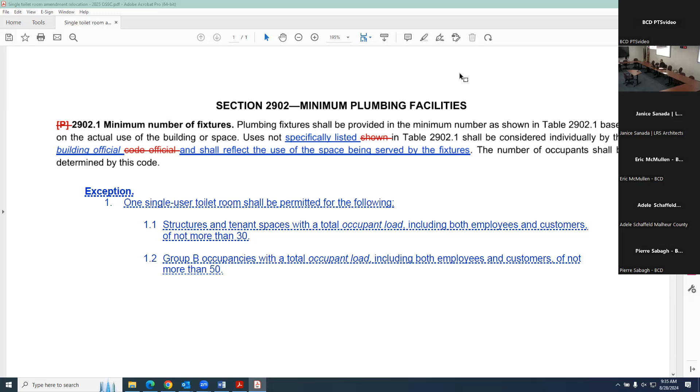So structures and tenant spaces with a total occupant load, including both employees and customers, of not more than 30, group B occupancies. Before it said business occupancies, and I know that there were questions that we received about that. So I changed that to group B occupancies with a total occupant load, including both employees and customers, of not more than 50. Any feedback on that? I like it. Thanks for that, Adele. Jody, any input on that? That should be fine. Yeah. Okay. Great. So we'll roll that into chapter 29.

What else do we have tabled, Laura? I'm seeing we have item 16-9, 17-8, 17-9, and 17-13 on the matrix. And we have SEAO here. I don't know if it's time to cover those yet or not. Yes, yep. And I see Seth. Thanks for joining us, Seth. And I see Ryan as well there. So with that, Jeremy, I'm going to turn it over to you to cover the tabled items. You can reintroduce them and let us know if you need anything. Great. Sounds good. Thank you.

Committee, turn your attention to 16-9 in the matrix. This was the minimum uniformly distributed live load table, Table 1607.1. There was a public proposal, SEAO2. So Laura, could you please pull up SEAO2? And I'm going to turn it over to SEAO representation, Seth or others on the call, to go ahead and talk through. Yeah, this one.

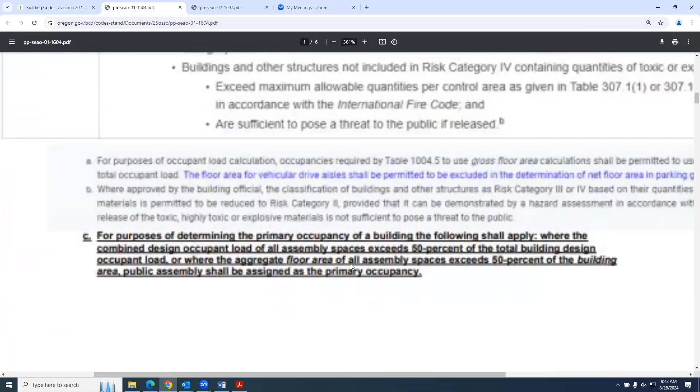Sorry, SEAO1. Public proposal SEAO1 clarifies how the primary occupancy of a structure is to be determined. I thought this one got approved by the committee yesterday. Yeah, I think it was approved. Yeah, this one was approved by the committee yesterday in my notes. Do you guys have the same record? Yeah, I've got flag to tell utilities as my note on that one.

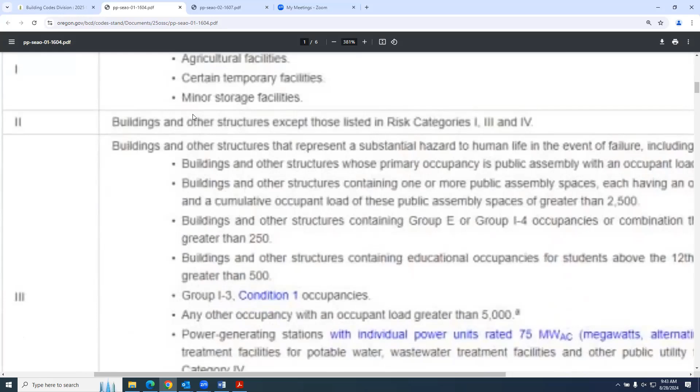Well, the one change we made to it was the public that was left in item 3 in Risk Category III, I think, where we added a strikeout. Oh, the second bullet point. Okay, I see. This has nothing to do with the public proposal. This was just a committee action, strikeout of the word public throughout that one. Yeah. Nothing related to the public proposal from SEAO on this one. This was just the committee's recommendations for cleanup on Table 1604.5, the use of public assembly.

Do we need to cover that right now, or can we just stick with the SEAO proposal items that were tabled yesterday? We can do the SEAO. Amit just joined. Okay. Are you able to unmute? Where'd he go? It's bottom left of my screen for me. I see you now, but you're still muted.

Let's go to item 17-8.

Oh, there you go, Amit. I see you. You just unmuted. Can we hear you, Amit? Yeah, can you hear me? Yes, yep, perfect. All right.

So we're talking about the proposal I think you wrote for live load in office space. Yeah. So I did my best to kind of queue it up, but I know you can speak better to it than I can. Yeah. So this proposal is just big. Can you hear now? Yeah. Okay. So this proposal is basically coming from a research work that was done.

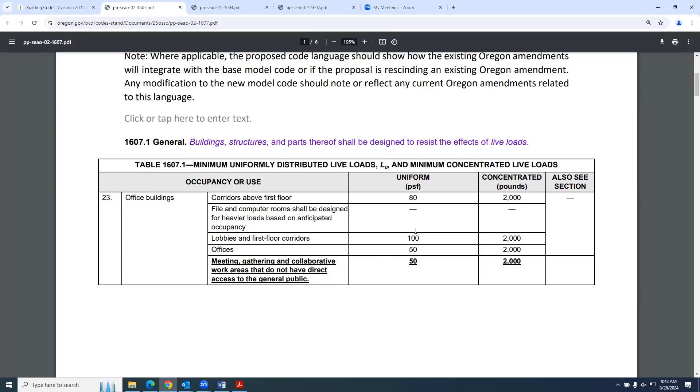Any other? So is it sort of your opinion or what was written in the study that basically assembly occupancy loading is a little too high? Is that kind of what? Yeah, basically to paraphrase the study, if you apply assembly or even the 80 PSF to an office space, it's really conservative for what's actually there.

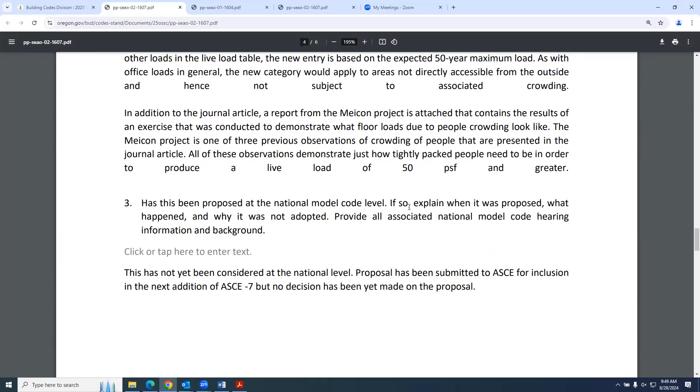Dave, I'm sure we could share the report that is being referenced here. I don't remember the exact words in the report, but it's 50 PSF is more than enough to cover office space. And it was authored by people who are very involved with ASCE 7 and have a very long history designing offices and working with those types of clients. So I can certainly vouch for the validity of the report, study, paper. But I don't know of any discussion of restricting the percentage or the overall square footage of that area.

So is this a report or is it an actual code change that's going through ASCE right now? It's both. It's a paper, and the paper is kind of the reason for the ASCE 7 change proposal. Okay. How far has it gotten through the code change proposal with ASCE? Because I know our stuff takes quite a while just to get through the code change process. Yes, let me look. Thank you.

I think it is about to be balloted by main committee this fall. Or let's see here. Let me check. Oh, never mind. It has already been balloted by main committee. Yes, it was live load ballot number 1.

You guys hear me now? Yes, we can hear you, Amit. Okay, I'm having real issues with my connection.

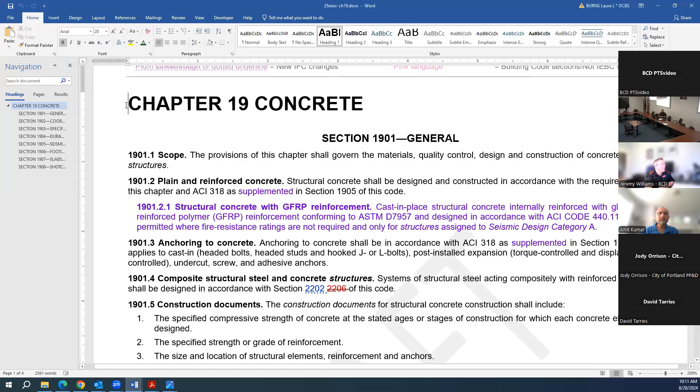And then you scroll down, it doesn't say to go to ACI for the quality control, and then we have the special inspection requirements down below in 1901.6. And then just like Rabi mentioned, in ACI 318, which we don't have access to share, but Chris Wong has that pulled up. So ACI 318-19 states, unless otherwise specified in the general building code, items shall be continuously or periodically inspected in accordance with sections 26.13.3.2 and 26.13.3.3 respectively. And 26.13.3.2 gives the continuous special inspection requirements that you're seeing in the SEAO proposal.

So that's generally how this is laid out from a code enforcement application, just so you can see what's going on here. And this is kind of a consistent issue, I think SEAO knows this as well, with AISC 360 for steel. It has quality control and assurance requirements that we don't directly point to. We carve out those things. We point to the special inspection tables.

Same with the others. And now we've got the stainless steel one where the model code is pointing to the quality control of that standard. Same with the proposal you'll see later that Dave Tarries will be talking about with the aluminum design manual. So there are these standards with quality control requirements, and our code has the special inspection requirements, so there's some overlap and cross coordination on how those are intended to be applied. Just wanted to share that. So this is up for committee discussion. Any other thoughts, input?

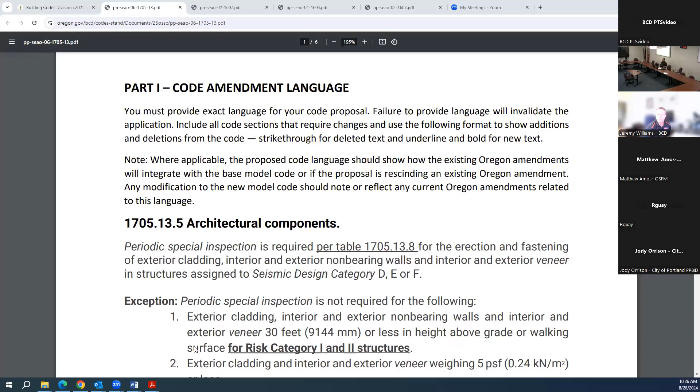So now I'll let SEAO speak up to this proposal, SEAO 6 in the matrix. Architectural components. You pull that one up, Laura, just so the SEAO folks on the call can see this one. Yeah. So if Amit, Chris, or Dave, or any others from SEAO representation could go over this one.

I could speak on this. There were a couple members on the codes committee at SEAO that felt there should be special inspections for some of the non-structural components, the architectural components, really the nonbearing partition walls, because they were seeing that a lot of those systems were being overlooked in the field during construction. And in particular, they're worried about the compatibility of those elements, those components, with the structural system for risk category 3 and 4 structures specifically.

So, as currently written in the model code, 1705.13.5 for architectural components, there is a periodic special inspection requirement for those elements, but there was an exception for what was believed to be light frame interior type walls, and it was sort of broad strokes. A lot of times these elements, even for the risk category 3 and 4 structures, were falling under those exceptions.

So this is really to modify the language in the exception to keep those exceptions in place for the risk category 1 and 2 structures, but to require the periodic special inspections on the essential facilities in the risk category 3 and 4 structures. So, was there anything you wanted to add, Dave, to this?

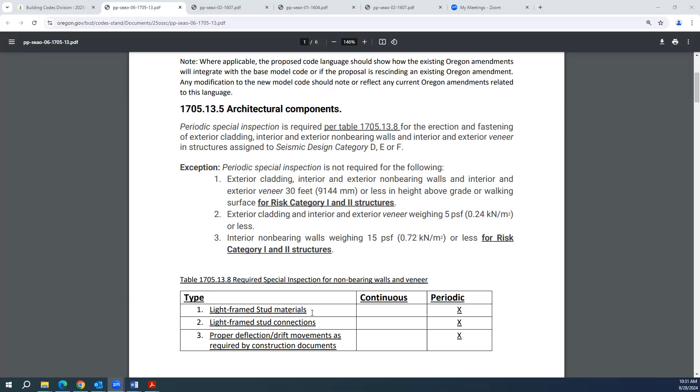So someone mentioned on this call a little bit ago about identifying in the drawings where those specific movements are required and where those special joints are, and having those be the locations where that inspection is actually required. I would agree with that. I think that seems like a reasonable compromise instead of having every single one required to have the inspection, because I do agree that may seem excessive, but identifying which ones may be more appropriate.

So how much time would SEAO need to maybe doctor this a bit to make it more agreeable to the committee? Yeah, Tony, when's the proposed meeting? September 17th. Oh, okay. Yeah, so the 17th, that's reasonable. If you want us to make some adjustments and give it back, we could do that.

Great. The other issue, I think you have to tell us what is the cost increase to the special inspection? And also, is there an attempt to change this code at the national level, instead of causing the building department to fail to do the inspection or add more costs? We have to find a way to make sure the inspection is done instead of just increasing the cost. I'm not sure if this one was on the list to go up to IBC, but after discussion on the last one, I can add this one and we'll be pinging IBC in the near future.

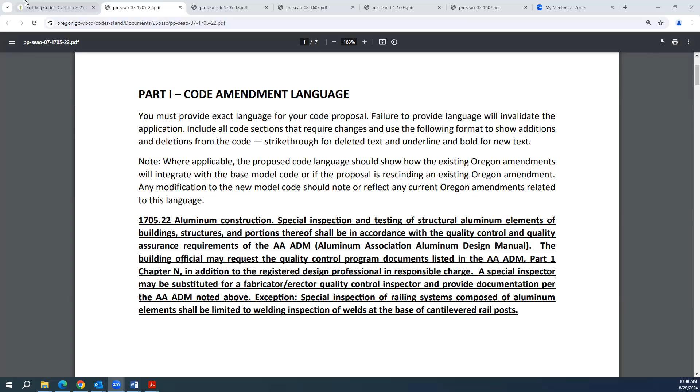Thank you. Is there any chance you could share with the committee what the requirements would be when following the QA requirements of the Aluminum Design Manual? I have some screenshots of chapter N. Do you want me to put those in the chat, because it's like 3 pages? But they're basically, okay, hold on a second. I don't know if they have a generic table of what the inspection requirements would be. Is it periodic and continuous?

It goes through that they have to have a program in place, sort of like you would have for a steel fabricator that is approved; pre-qualified is kind of a thing. They have to have their welder performance records, all that stuff listed. I think I just posted the first page. It seems like it's really more of your basic qualified fabricator.

However, there is a case where you could do some of this in the field, and that would include the same sort of qualification of your welders and review of the welds, but in the field. So that one could more easily be a special inspection issue if they're doing it in the field, which I have seen a couple of times now, field welds for aluminum. Let me finish copying these in.

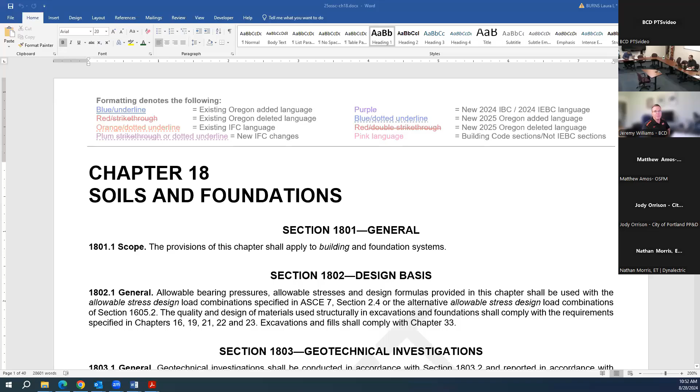All right, so where are we at? We're at matrix item 18-8, frost protection, section 1809.5 of the code. Just a little background on this one. So this is section 1809.5. You'll see the blue underline there under item 1, frost protection.

Extending below the frost line of the locality, there's this new proposed "in accordance with table 1809.5." And if you scroll down, you'll see the new table 1809.5 lists all the counties and the frost line depths with some footnotes. The reason this is in here for your review is during the design criteria hub training sessions we provided for local jurisdictions, we got a question from Clackamas County Building Department who told us, hey, for frost line depth, we're seeing it shown as 12.

For commercial applications, we have a threshold that we require in Clackamas County. Our residential code currently says 12 inches frost depth. For commercial structures under 2,500 foot elevation, they enforce 12. Between 2,500 and 4,000 foot elevation, they enforce 18. And above 4,000 foot elevation, they enforce 24-inch frost depths for their commercial buildings. And they also recommend that. So that's what's being done in Clackamas County currently.

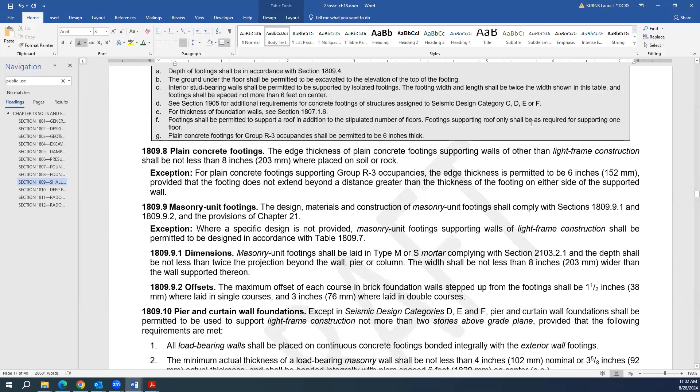Thank you. 18-9 on the matrix is section 1809.14. This is for shallow foundation systems, grade beams at shallow foundations. There was a national proposal, S165-22, by the geotech community. It adds grade beam provisions to shallow foundations, which align with ACI 318-19 and ASCE 7-22. It just provides an alternative and options for the designer. No fiscal impact.

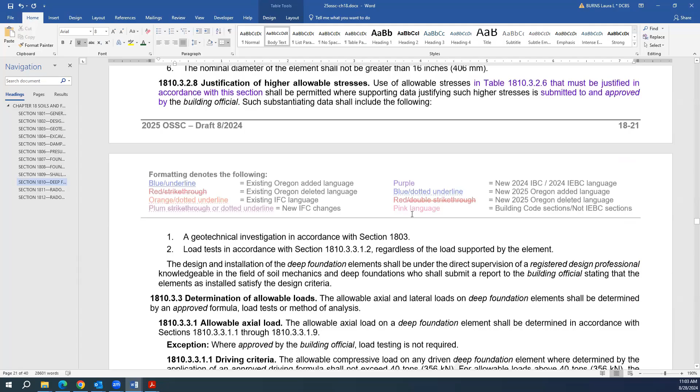Any concerns with the committee on this one? Nope. Hearing none, that one's approved. No fiscal. 18-10, similarly for deep foundations, same updates, same proposal from the proponents. So it's section 1810.3.12. Alignment with ACI 318-19 and 7-22. No fiscal. Any concerns with this one? Hearing none, that one's approved.

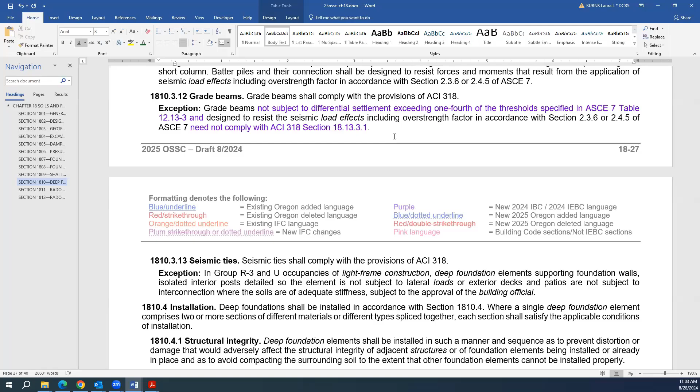18-11. I'm handing it over to you, Eric. Okie dokie. Thank you for that. My thing is working. There it is. What did we do here? We updated, keep going down. There was this section. Keep going.

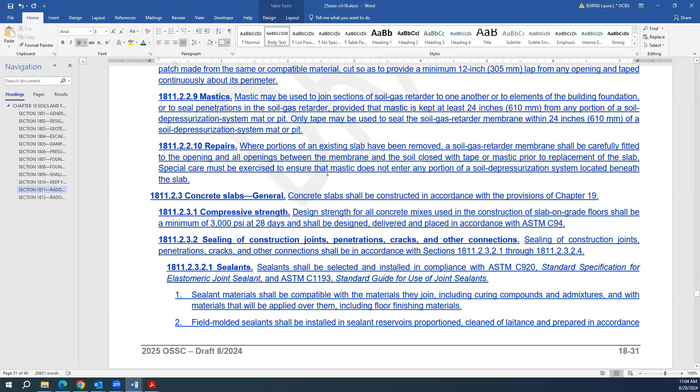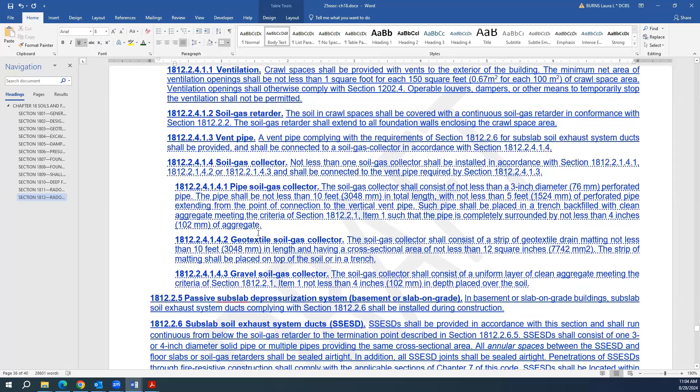This one is just similar updates. 18-11 is just retaining the Oregon amendment for public buildings in 1811. Yeah, no change all the way through here. This is the current radon thing. There's two sections, basically the public building section, and then there's the R section. And so we need to go down to the R section. Keep scrolling. Sorry, I don't remember the exact section, but there we go. Hold on. Right there. Back up a little bit higher.

Yeah. So what we did here is the language there, 1812.2.4.1.4, is primarily the change. We had to tweak a couple other sections just to make it work. The soil gas collector language was language some of you may recall that we added to the ORSC as well. And this was just to align with current EPA standards, which is what our statute says for radon, that we need to align, in so much as possible, with EPA standards.

So the problem was that our old standards used to just require a vent stack up through the roof and a T under the plastic basically, and that was it. And then we required an electrical connection in an attic space or an accessible space, so a fan can be added later if a passive system wasn't adequate. Well, what we discovered was that caused some downstream problems later because you can't just hook a fan to a stack pipe with a T and have it effectively work.

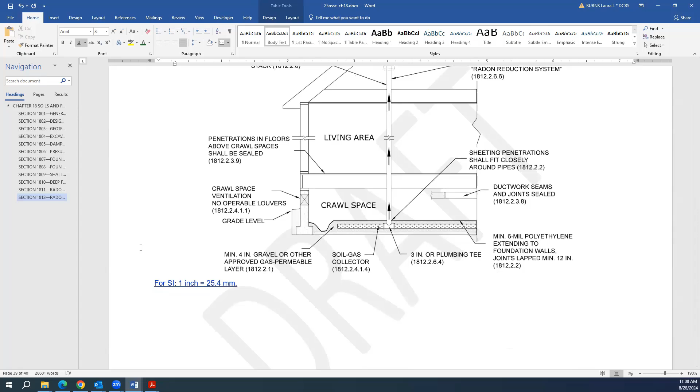It's still showing one option in the res code. It says perforated pipe option shown. So we may want to talk about doing that so they match up with the res code. But the pictures didn't change because we showed the perf pipe as an option previously. All good?

And Pierre there, I'd have to look back, I was going through this morning and didn't, sorry, but there was a number on this for cost increase for the res code. So it is a cost increase. I think it was $200 or $300, if I recall correctly, but you can look back in the res code if you need to.

All right, thanks, Eric. We can verify the actual number later. I'll write cost increase for now and put around 300. We can verify that later. Okay. So I'll take it back to Jeremy then. Thanks, Eric.

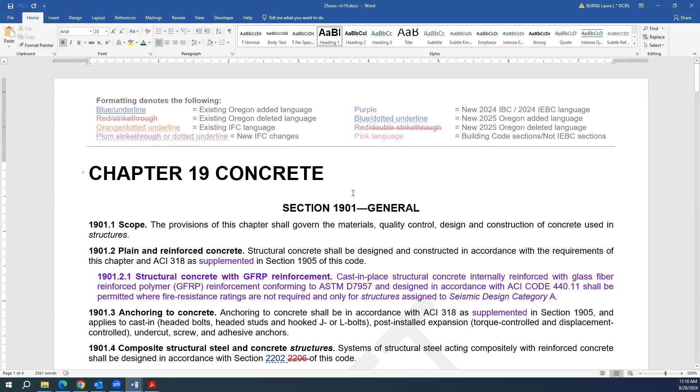Matrix item 19-1, section 1901.2.1. There was a model code proposal, national proposal S174-22, adding a new provision to allow limited use of glass fiber reinforced polymer reinforcement, GFRP, limited to seismic design category A and where fire resistance ratings are not required. References a new ACI standard.

I forgot to flag this one for you, Tony. This is one where we might want to consider striking, and the committee can weigh in on this too, but we don't have SDC A, so it just wouldn't be applicable. And this is very, very limited use at this point, so I just worry it could create a problem. It's in the code, but it's up to the committee. I would say we'd strike it based on the general principle of hierarchy. Okay, non-application.

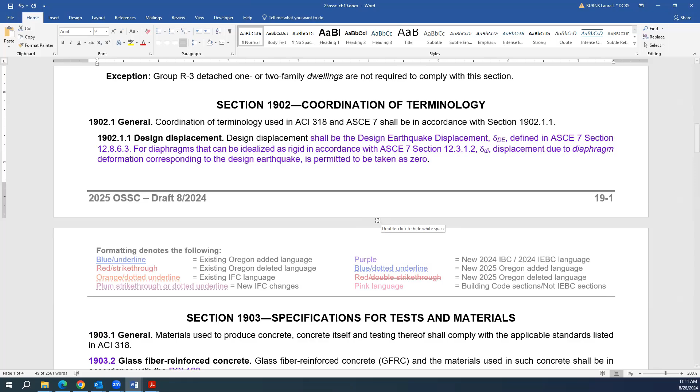Any concerns with striking from the committee? Hearing none. Next one. Matrix item 19-2, 1902. Terminology coordination between ACI 318-19 and ASCE 7-22. No substantive changes here, just aligning those two standards, and no fiscal impact. Any concerns with this from the committee? Hearing none. That was approved. No fiscal.

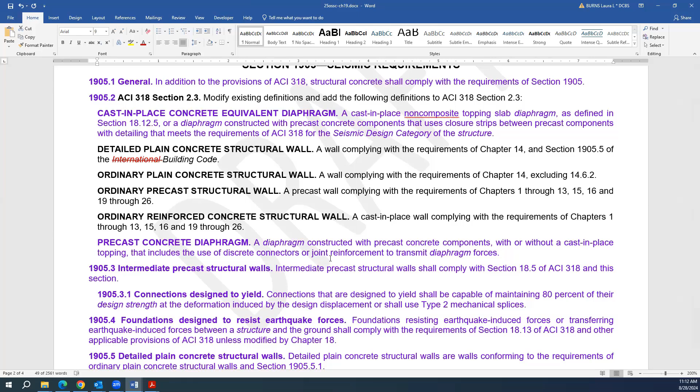19-3 is modifications to ACI 318, 1905.1 through 1905.7. If you see all this purple throughout, it looks like a lot, but there's no substantive changes at all from current code. It's just a reformatting. Instead of specifically modifying ACI 318-19, the provisions are now supplemental to ACI 318-19, which is supposed to be more user-friendly for the designer or code user. No fiscal here. Any concerns with this item from the committee? Hearing none, that one's approved to align with model code.

19-4, section 1907, slabs on ground, national proposal S173-22, added provisions to clarify slab on ground requirements for structural versus non-structural scenarios and for alignment with the provisions in ACI 318-19. No fiscal associated with this, noted at the national level. Any concerns with this model code inclusion and alignment? Hearing none, that one's approved.

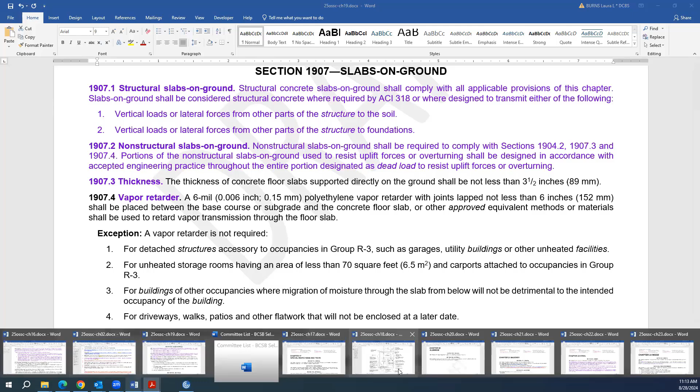That's it for 19. That was pretty short and sweet. We went over 20, there was nothing really to share and no matrix item on the aluminum. So we're down to chapter 21, masonry. Matrix item 21-1, section 2101.2, Oregon amendment. These are existing amendments to clarify that the design loads need to be determined in accordance with chapter 16 of the code, not the reference standard. I think it was TMS 402 that has some outdated design criteria, so we point back to our code. So no issues with retaining the existing Oregon amendment.

And right below, 21-2 on the matrix, 2101.3 special inspection just clarifies that it's got to be done in accordance with chapter 17. Any concerns of the committee on those two items, retaining existing amendments? Hearing none, those are retained.

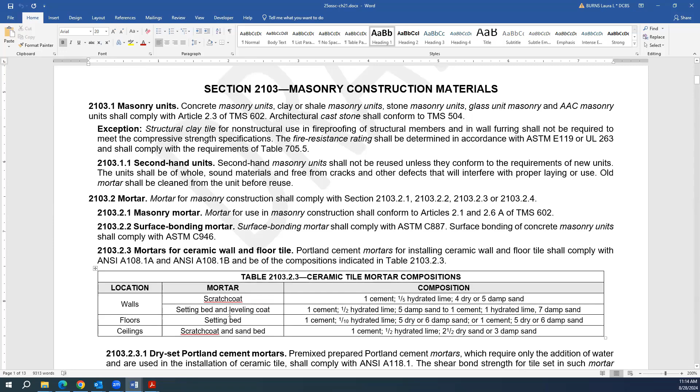21-3 on the matrix, section 2103.2.4. That purple language, we had an Oregon amendment in the 2022 OSSC in this section. It became obsolete with this new language that requires conformance with section 13.3 of TMS 402, which has been updated. We confirmed with the Masonry Institute, who proposed the original OSSC proposal, that it is now obsolete. This aligns the mortar provisions for adhered masonry veneer with TMS 402, no fiscal impact. Any concerns? Hearing none, that one's approved.

21-4 on the matrix is section 2104.1.3, longstanding amendment of TMS 602, article 3.2 F, cleanouts. It adds an exception to increase the 5.33 grout lift height threshold for cleanouts where special construction procedures are met. Retaining this existing amendment, no changes. Any concerns with this one? Hearing none, that one's retained.

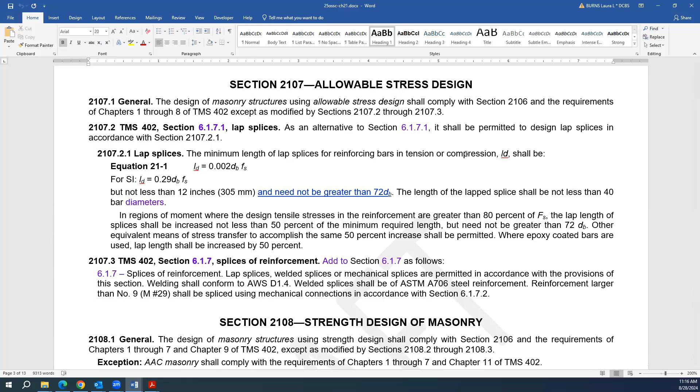21-5 is section 2107.2.1, existing Oregon amendment regarding lap splices, longstanding amendment clarifying an upper threshold of 72 bar diameters for the required lap splice lengths. Any concerns with retaining this Oregon amendment? Hearing none.

Next item, 21-6, section 2109, empirical design of adobe masonry. Be aware that TMS 402, the new 2022 reference standard for masonry design, no longer includes an Appendix A for empirical design of adobe masonry. But the 2024 IBC and 2025 OSSC, if you approve this change, will still allow use of the 2016 edition of TMS 402 Appendix A for those designs. So no fiscal. It's just putting the edition directly in the code because it's not in chapter 35. Any concerns with this from the committee?

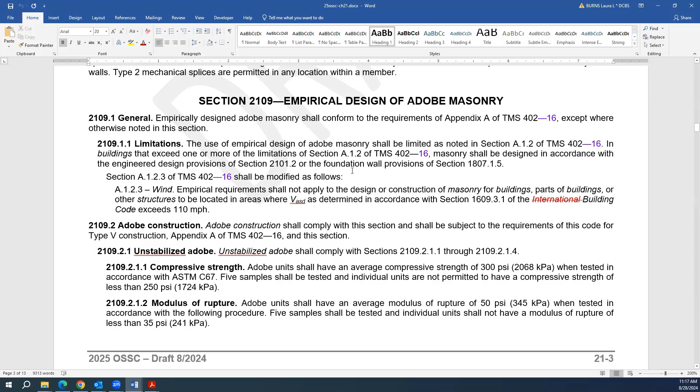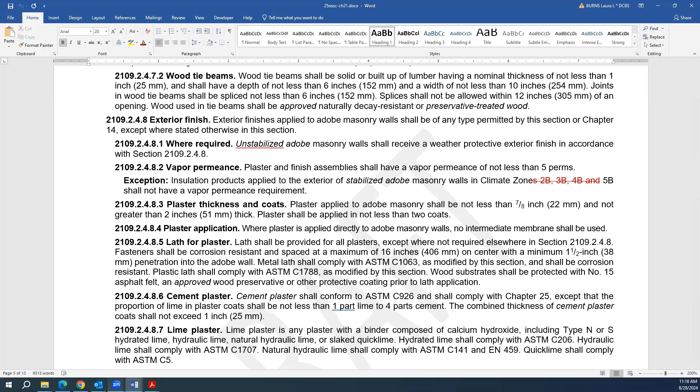Hearing none, that was approved. 21-7. This is just a FYI really on the matrix. It's section 2109-2482. It aligns with the energy code, strikes out our code. OSSC typically strikes out all non-applicable climate zones. So we just have 4C and 5B in Oregon, so those are struck. Any concerns with that? Hearing none, that Oregon amendment is retained. So we're done with chapter 21 masonry.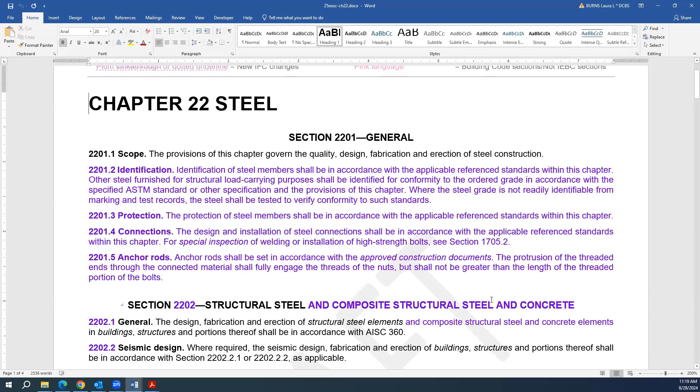Chapter 22 steel, 22-1 on the matrix. National proposal here right up front. You're going to see a lot of purple again here on this one, but it's no substantive changes here on this line item. It was proposal 187-22 by the steel industry. It's a coordinated proposal that adds updated reference standards and reorganizes and consolidates the different sections in the chapter for the purpose of providing better flow for the user and clarifications of the steel provisions in the code. That is what it was intending to do.

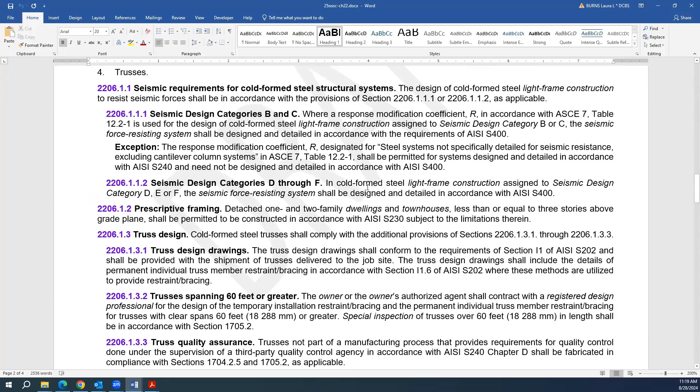Any concerns with that line item on the matrix? Hearing none, that's approved. 22-2 on the matrix is section 2206.3. Cold form steel light frame construction, cutting and notching. This was a model code proposal to add new uniform standards for field modifications for cold form steel framing members for consistency and alignment with other codes. So you got plumbing code, different codes that are kind of talking about this. So this just helps clarify points to meet the requirements of AISI S240 and S220. No fiscal impact here. Any concerns from the committee on this model code? Added for clarification. Hearing none, that one moves forward.

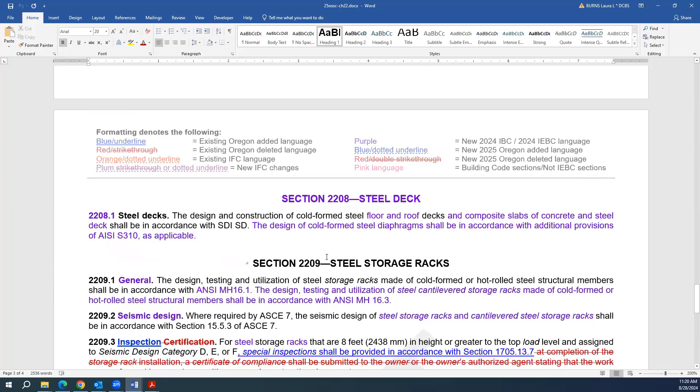22-3 is section 2207.2, item 3, and 2207.4, item 4. I think on the matrix, this says steel storage racks. Probably my mistake there. It needs to be steel joists and joist girders on the matrix item for that one, Laura. And the IBC proposal there, we need to change from S194-22 to S189-22 just to make sure the matrix is updated. So this one. Let's see here.

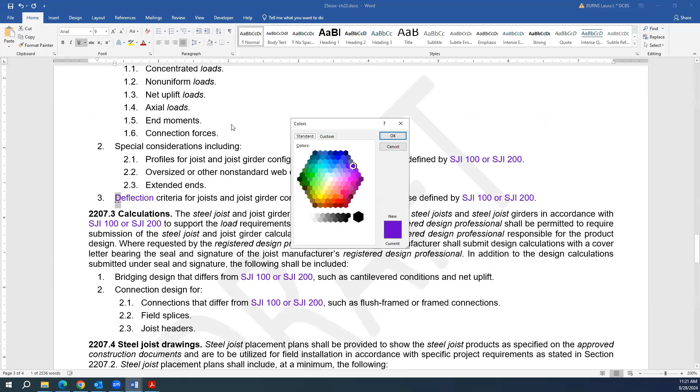So 2207.2 item 3. Yes, where it says deflection criteria in purple, it used to say live and total load deflection criteria. Those reference standards don't have a total load deflection criteria. It's just a live load deflection criteria. So it's creating some confusion. It's a cleanup clarification, no fiscal. Any concerns from the committee on that one? Or no, sorry. No, you don't need to change that. I was just explaining what our 2022 OSSC currently says, live and total load deflection criteria. So this change is just changing it to deflection criteria, which is what the model code did. Thanks. So no concerns from the committee on this one, no fiscal, that one moves forward.

22-4 is section 2208.1. Steel decks. This was a model code change, S194-22. If you look at the 2022 OSSC, there's some different reference standards here for steel decks, and it's different for roof deck and floor deck and concrete deck. And now they're all in one spot in a new standard. It's the Steel Deck Institute's new consolidated consensus reference standard for all steel decks. It's titled ANSI/SDI SD. So no fiscal here. Any concerns from the committee on this one? Hearing none, that one moves forward.

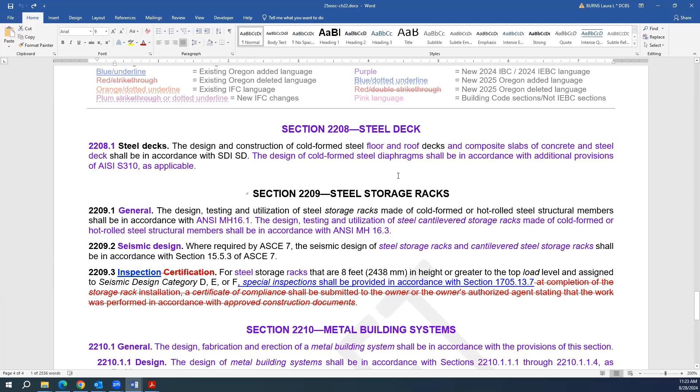Item 22-4B. Oh, sorry. Laura, this is one where it's an existing Oregon amendment. I didn't see it on the matrix. I must have missed that one. It's section 2209.3, that edit we make there. That was made last code cycle based on some new language regarding certification requirements. The model code required a certificate of compliance to be submitted to the owner or the owner's authorized agent, but it never said it had to go to the building department. So we basically said it's hard to enforce. Let's just point right back to the special inspections. So this is just retaining that edit based on committee recommendation. Any concerns with retaining existing item 2209.3? Hearing none, that was retained.

Item 22-5 on the matrix is section 2210. Metal building systems. So this is the new section I was talking about when we were in the special inspections. And again, thanks to Ellie for providing that info on the metal building systems that we'll eventually be going back to for the special inspections. On this one, it was proposal S197-22, new clarifying provisions and definition for metal building systems, aka pre-engineered metal buildings, which are uniquely different from other forms of steel construction. I don't know if the committee wants to look at the definition again. We pulled that up last time. No fiscal here for these provisions.

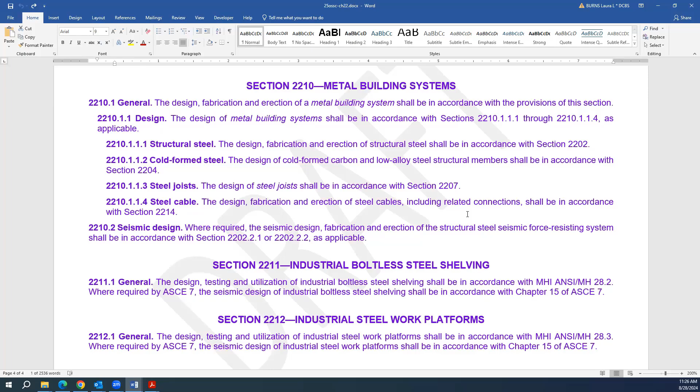22-6 on the matrix is section 2211, industrial boltless steel shelving. So this is material handling institute pushed through some proposals that you're going to see here throughout these next couple sections. So this first one is industrial boltless steel shelving. So instead of steel storage racks, they've got a new standard here that would capture these lighter duty kind of rack systems, storage shelving.

And so that standard is MHI ANSI MH 28.2. So that's a new standard. They said that on this item, it's proposal S191-22. They mentioned a decrease in construction costs in the industry since it consolidates design, testing, and use requirements into one standard for these unique material handling industrial boltless steel shelving systems.

Jeremy, did they happen to say if that standard would be viewable for free, or is that a new standard we'll have to purchase? Yeah, I think you do have to purchase it. I think I saw yesterday, I was looking for it. We got a hold of it about a year ago because they asked us to take a look at it and review it. But I think it does cost $50. Okay. Let me double check.

Any other thoughts from the committee or discussion on this item? Yeah, it's $50 from the ANSI web store. Okay, thank you. Yeah, most of the other steel standards are free. So just not these reference standards here. So no discussion on this item from the committee. So this one moves forward.

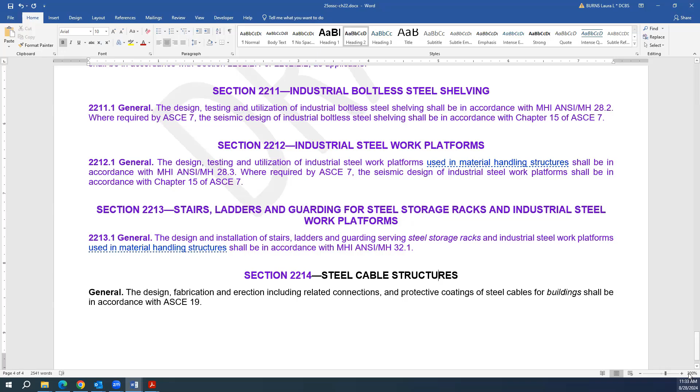All right, thanks. 23-1 on the matrix is section 2301.2. This is just a model code clarification for cross-laminated timber thickness. Wherever that's specified, that's deemed to be an actual dimension, not a nominal dimension. So no fiscal impact here, just a clarification. It was proposal S199-22. Any concerns from the committee on moving forward with that one? Hearing none, that one's moving forward.

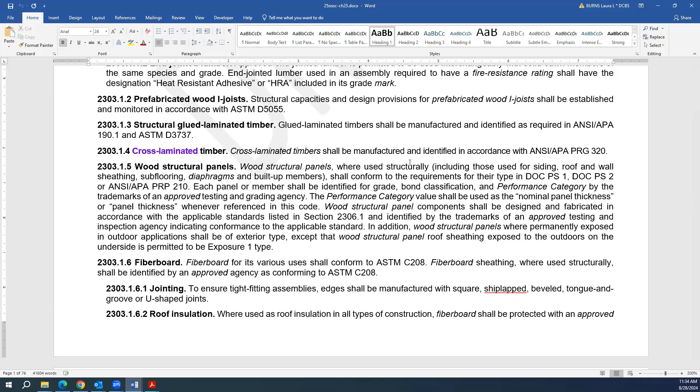23-2 on the matrix is section 2303.1.4, cross-laminated timber. There was a proposal S200-22 that changed the naming convention from structural glued cross-laminated timber just to cross-laminated timber for consistency with the industry's terminology naming convention. No fiscal impact, just pointing that out. So that one moves forward.

23-3 on the matrix is section 2303.2.1. This is a new alternate fire testing national proposal that came through, created an alternate equivalent compliance path referencing ASTM standard E2768. No fiscal impact, just an alternate that I believe was already allowed by the current rules, but it's more specific now. Any concerns with that? Hearing none.

Section 2303.2.6, matrix item 23-4, design values. This one was proposal S202-22. Clarified that the design values for fire retardant wood require adjustment factors applicable to untreated wood, so that you get all those adjustment factors from NDS for your design, and that the fire retardant adjustment factor is in addition to those. So I guess folks were missing that, and now this just helps clarify that requirement. No fiscal here. Any concerns from the committee on this one? Hearing none, that one's approved.

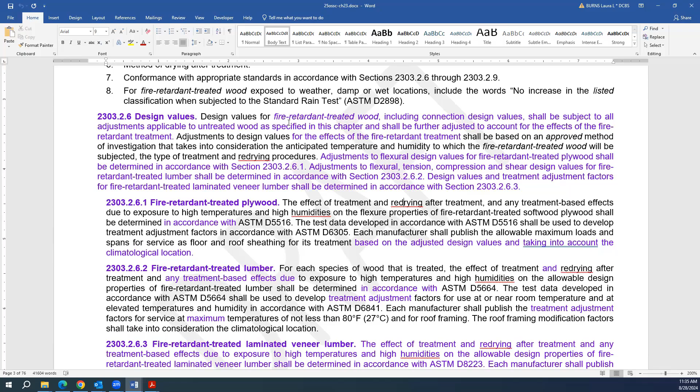23-5 on the matrix is section 2303.2.6.3, fire retardant treated laminated veneer lumber. There was a national proposal S203-22 adding provisions for manufacturers to comply with new consensus reference standard ASTM D8223 for development of the design values for this specific type of fire retardant treated laminated veneer lumber. So LVL, no fiscal. Any concerns from the committee on this one? Hearing none, that one moves forward.

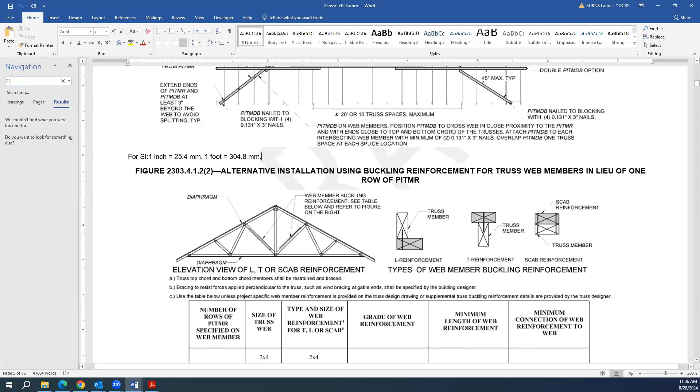And then item 23-6, table 2304.6.1. This is the maximum basic wind speed permitted for wood structural panel wall sheathing used to resist wind pressures. You'll see there's an S207-22 model code proposal that added footnote D that cranks up a requirement. This would be a cost increase in the areas of the country where the specific gravity of your wood material is less than 0.42.

Doug fir larch is 0.5, hem fir is 0.43. Some northern species, eastern softwood, spruce pine fir, are all about 0.36. So if you're using those other species not common here, you'd have to do an adjustment factor on these nail spacings. You get cranked down. So this is an AWC proposal. They did some calculations and found that they needed to clarify that these attachments are based on the wood species.

So I don't see this affecting Oregon, to be honest with you, from a cost impact. But I don't recommend striking it. I would just retain it for model code. Any thoughts from the committee on this? Hearing no concerns, this one was retained. Likely no fiscal to Oregon, Pierre. Slight cost increase, potentially, if somebody happened to use an uncommon wood species. Thank you.

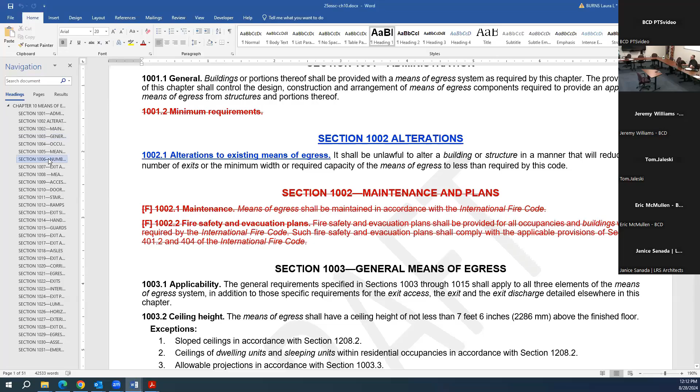So we're going to back up now into chapter 10. We covered already the 2 public proposals there. Obviously, we handled those yesterday. So we're going to start out in item 10-1, equipment rooms containing boilers. For those of you that recall this in 1006.2.2.2, this was an amendment that was made in conjunction with the boiler program and the boiler code. So that was the genesis of this. Nothing is changing. This is just an existing Oregon amendment. Any questions, comments, concerns with retaining this? All right, seeing none, we're going to move on.

I'm going to switch my screen here. I'm used to having many screens, but I only have one.

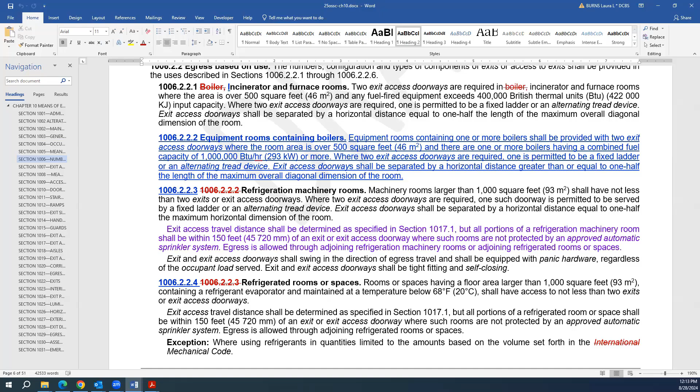Next item, 10.06.3 is a model change, egress from stories or occupiable roofs. And this is just basically some adjustments here with the terminology from occupied roof to occupiable roofs. See that throughout. The addition of smoke protected assembly seating along with that existing open air assembly seating. And then could you scroll down there? Yep. And then just the addition of occupiable roof to the minimum number of exits or access to exits per story or occupiable roof. We're proposing to adopt the unamended model here. Any questions, comments, or concerns?

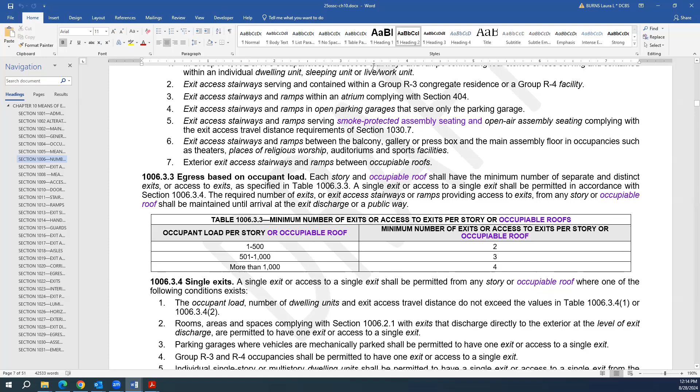No, that seems good. Great. Thanks for that, Jody. All right. That one does not, I don't think there's a fiscal associated with that. We didn't note it here on the matrix. Next, 10.06.3.4. We already handled that one yesterday.

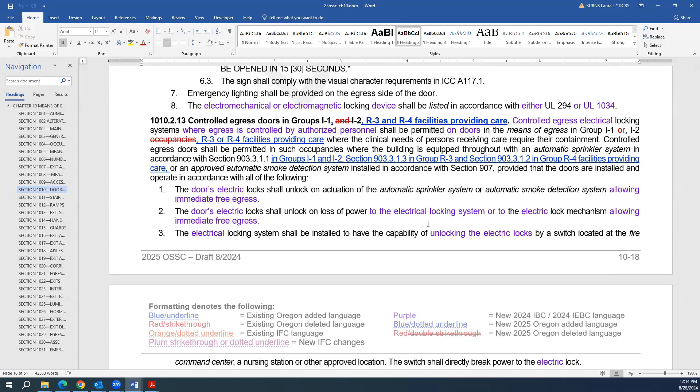10.10.2.13, controlled egress doors in groups I1, I2, R3, and R4 facilities providing care. This is an existing Oregon amendment throughout here, and this was part of the alignment with licensure. And I don't know, Janice, does this still look good to you if you're online? There's some changes in the model language. I don't think there's an intentional modification here, just clarification. And then we're keeping the amended inclusion of those other groups.

Yeah, on first blush, it looks fine. I'll take a deeper dive and let you know if there's anything that I'm confused by. Okay, that'd be great. And we can always bring it back up. We still have one more meeting, and then we'll also have the board meeting, of course. So we'll take a look at that next one. You just went past it there.

New model section regarding elevator lobby exit access doors. So this was all new. I don't see this one. Okay, we'll add this one to the matrix. We're just proposing to adopt the model unamended. Here, I'll give you a minute to read it. Any comments, questions, concerns on this one?

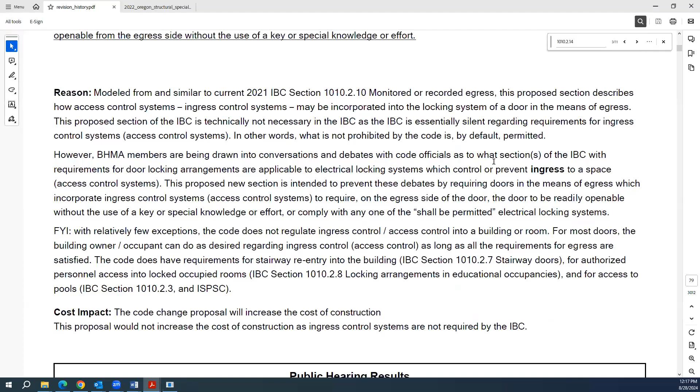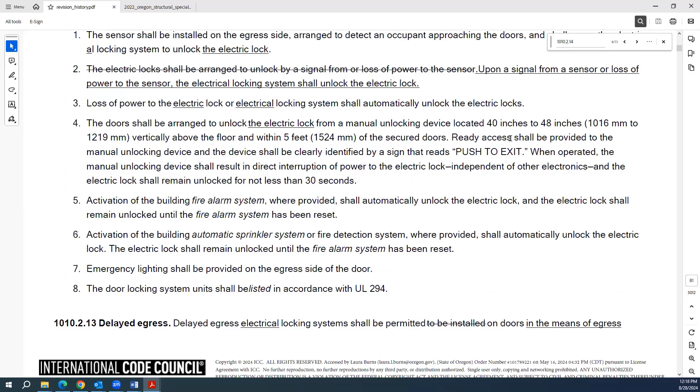No, it looks like these aren't, that's not it. Yeah, that's right, but they're referring to it in the wrong place. Yeah, but that's not it there. Scroll down. What do they have for 2.14? Nope, that's wrong. So, okay, so now we've got to search.

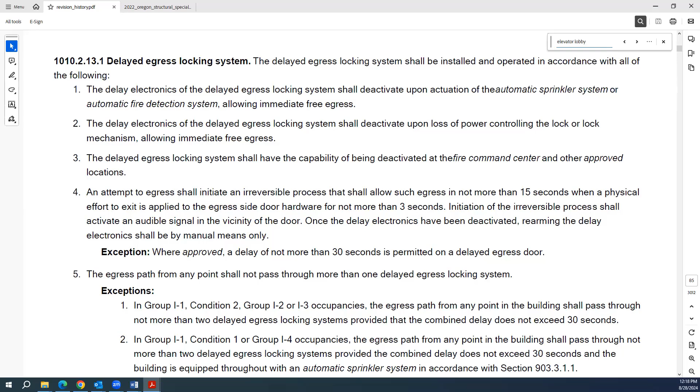It would be elevator, whatever the title is. If we can go back to the chapter, we'd have to just search the title because the numbering is not correct. Elevator lobby exit access doors. You got it? Great. Can we look at the reason statement and the fiscal?

Is there a companion section? Because this is talking about how it's an alternative to the long-standing requirement that the lobby has access to at least one exit. It seems like if they're changing that piece of the requirement, there would be other sections included. Yeah, it includes chapter 30, means of egress in 30.06.4. So if we just scroll down a little bit further, maybe go up. Maybe it's up. Yeah, right there. So you see that there in 30.06.4.

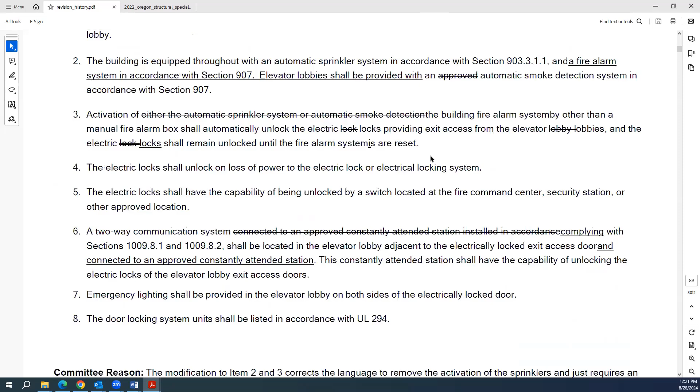And then in 10.16.2, if we see the 10.16.2 part of it, an exit access shall not pass through a room that can be locked to prevent egress. And then there's a new exception, an electrically locked exit access door providing egress from an elevator lobby shall be permitted in accordance with section 10.10.2.15.

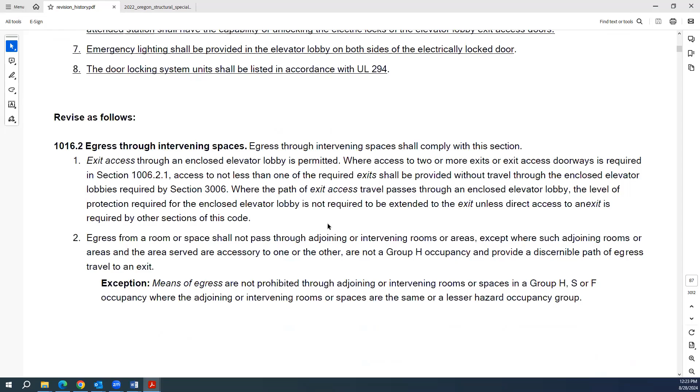And it's just an option, right? I mean, yeah, it allows locks where there didn't used to be locks, basically. Right. And they have to meet all of these pieces, and they don't have to meet one of those other special locking arrangements. Right. Okay. I mean, it was adopted at the national level, which in theory means it's been vetted by lots of folks. I don't see how it increases the cost of construction, honestly, because it's an option.

Yeah, I agree with you. I think that's how we should note it, because it's not required. Right. So, yep, I think that's a good comment. Pierre, do you get that? Got it. Perfect. Okay, anything else from the committee? Thanks, Jody. Anything else on that one?

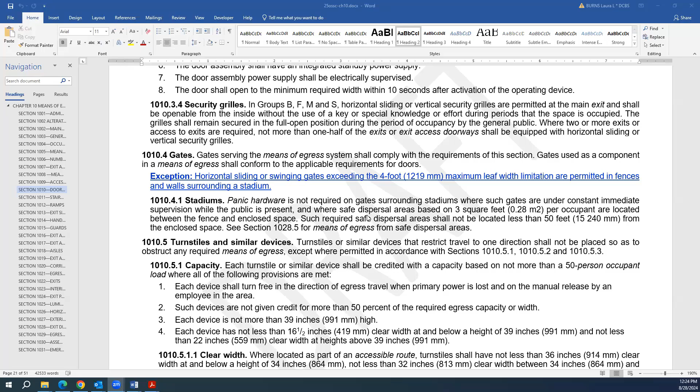All right. Moves us on. That one we added, right? That was a bonus addition to the matrix. Laura will make that addition. We are now on 10.10.4. Existing Oregon amendment. It allows horizontal sliding or swinging gates exceeding the 4-foot maximum leaf width limitation to be permitted in fences and walls surrounding a stadium. This existing Oregon amendment moving forward. Any thoughts, questions, concerns? All right, you got a thumbs up there. Great, thank you. Moving on.

We've got 10.11.11. Existing Oregon amendments here. These are long-standing Oregon amendments, really for the group R3, right? Instead of single riser, we align it with the residential code. When we have a change in elevation consisting of a flight of stairs with 3 or fewer risers and an entrance or egress door that does not require handrails, just as we do in the ORSC. And then same with item number 3 above there. And then we renumber.

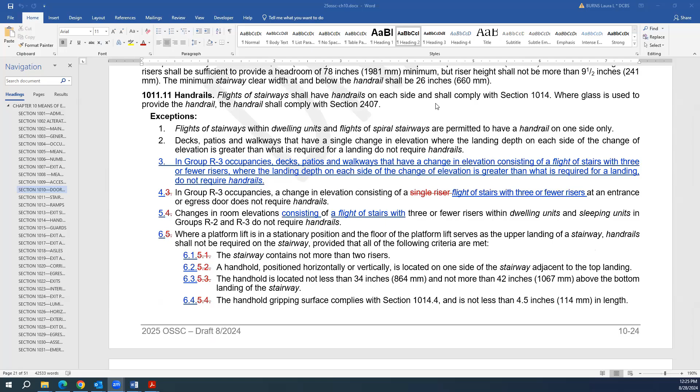Any concerns with retaining these existing Oregon amendments? Okay, seeing none, we're gonna move on. No fiscal. The next one, 10.11.12, stairway to roof. So this was one where we had some help from Jody and some other folks. We got this cleaned up quite a bit. This was a long-standing Oregon amendment that originally came from Portland Fire and Rescue. I think we've pretty much perfected it. In its current form, the only change you see is occupied to occupiable. Thanks, Nathan. I see the note there. So any concerns with retaining this existing Oregon amendment? Great. Keeping that, no fiscal.

The roof access is kind of considered in that. You'll remember the last iteration, we expanded that based on what's readily available on the market. So there was a slight cost increase there, but it really makes more sense. It's more easily attainable for folks putting the hatches in for the trapdoor option. Any concerns with retaining existing Oregon amendment? Seeing none, we're gonna move on. No fiscal on that. We skip 10-9. We covered that yesterday. I'll have some language to look at before or at our next meeting in September on 10-9.

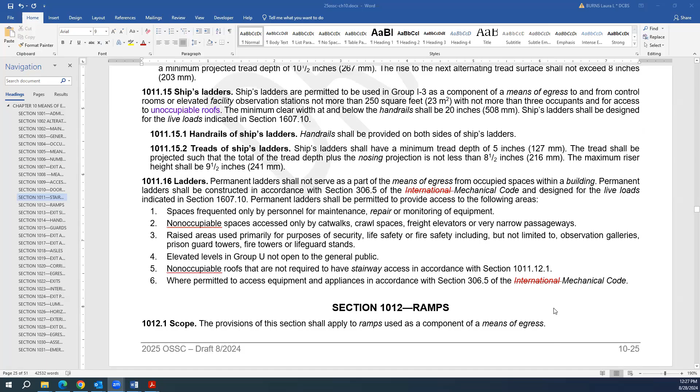10.15.8, window openings. So this was one they've reworked the language below, non-technical. I don't think they noted it as technical, just clarification. But we add the 'or flat surface not less than 36 inches in width below' as the window fall protection threshold. And this aligns with what we have in the ORSC as well. I think the issue was that folks were looking at little eyebrow roofs or window casings as being a surface below, and saying they didn't need fall protection because of the distance to that little eyebrow roof. So this is to clarify that you need to actually have a surface there.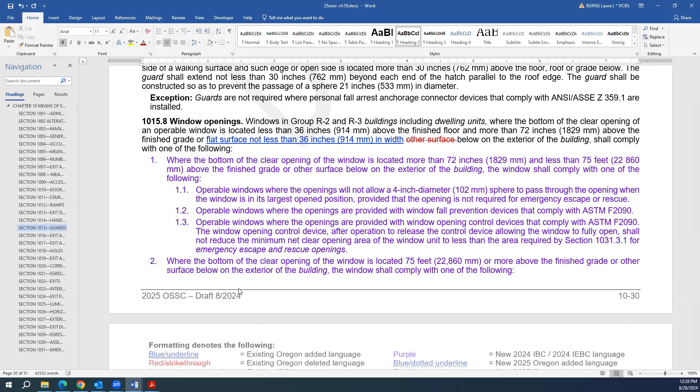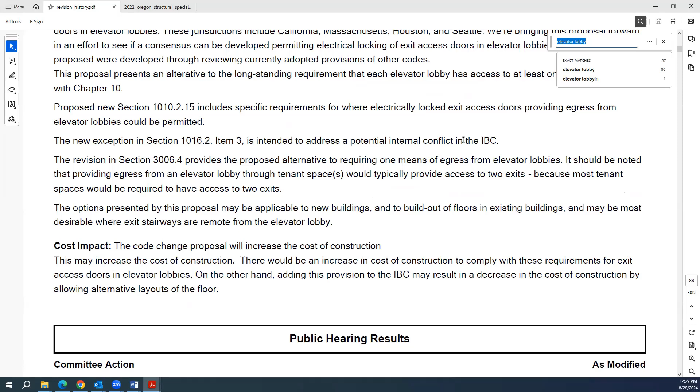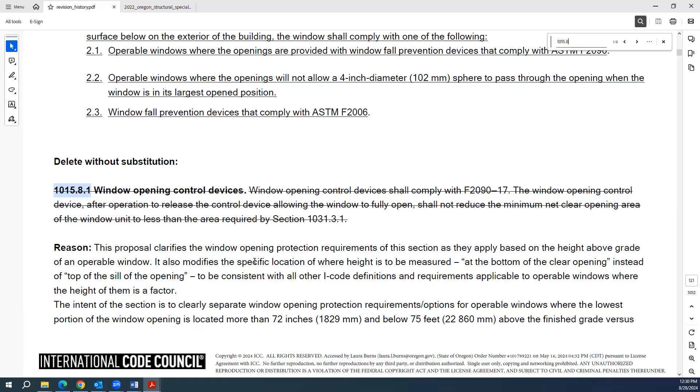And then also you just have some more options. They basically have taken all the options and reformatted them here in the new purple language. Give you a minute to read that. And then number two, I believe number two is new. So they combined a bunch of the requirements. Yeah, so it's just a clarification. Can you go down below a little further? As written. No substantive changes to the technical requirements, so it looks like they just reorganized them. Any concerns with the reorg, just adopting the model code here? Seeing none, we're gonna adopt that. No fiscal on that, Pierre.

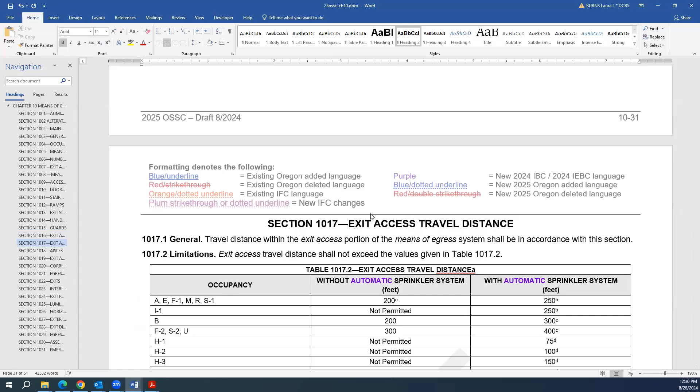That moves us to, could we add that part to 1010 in the matrix as well? Thank you. 10-11. This was the group H5 increase, and the national proposal was E8621. This was something we worked through with Kenton and Eric Sandoval in the 22 OSSC process. And so this basically just removes our existing Oregon amendment, which then aligns with the new model code. Any concerns with that?

Hey, Tony, it's Pierre. Can you just clarify 1010? You said we're adopting model code, no fiscal. Did I get that right? We're maintaining existing Oregon amendment and then adopting the new model. Gotcha. I wanted to make sure I wrote that down correctly. Yep, you got it. All right, and then it looks like thumbs up on 10-11. Again, no fiscal on this. It's just the code caught up with Oregon code. And then 10-12, 1031.7.

The next two are a series of additional, these two here we added the last go around as Oregon amendments, basically just for alignment with what we have on the ORSC side. So if you happen to have, you know, a mixed use group R3 and a B, for example, an attached group R3, you'd still be looking at the same type of protections when you consider the EEROs. So that is item 1012 and 1013. Any concerns with retaining those?

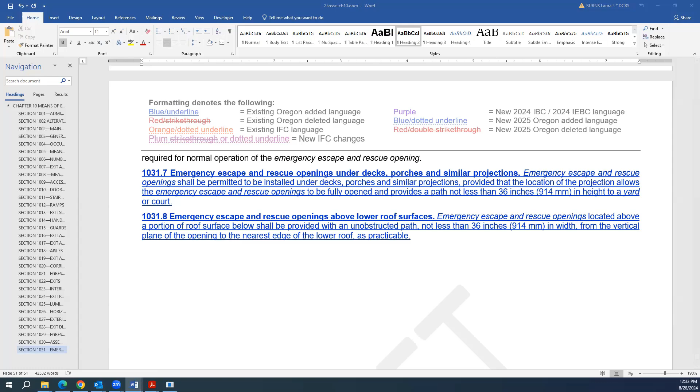Okay, seeing none, those are approved, and that makes it all the way through chapter 10. I have some homework prior to the next meeting. I'll come up with some proposed language on incorporating the Eurocode pictogram along with our exit. And then we move to chapter 33.

There was one item on chapter 10, 1015 on the guards at the roof. And this little section, those two pieces that got added. Adelie, do you remember they have another proposal to maybe change something, but I think we like this one better, right? I feel like we talked about it, the OBOA code change stuff. But anyway, I just wanted to bring this to the attention of the group and maybe put it in the matrix just for the training portion, because it is addressing an area that was not very specific previously.

It was brought up, Jody, you're correct. I just don't remember the exact specific point, but it was noted as a difference. I think there was a proposal for the 2027 that instead of approved barrier, it wanted to make it more specific, like it needed to meet guardrail requirements or something like that. Oh, that's right. Because I think I even remember some other discussion about flower pots as well. Yeah, making sure that those were true barriers when they were on a roof.

So I don't know if we just want to adopt regular model code, which is what they've got right here, that's fine with me. It is a little vague. Personally, I find that fine because I think if your occupied roof is 15 feet from the edge and you've got a 2-foot tall planter to define the edge of the roof, nobody's accidentally going to fall. There are people who will purposefully go past that and put themselves in danger or their kids or whatever. But I don't know. I don't want to speak for everybody on that.

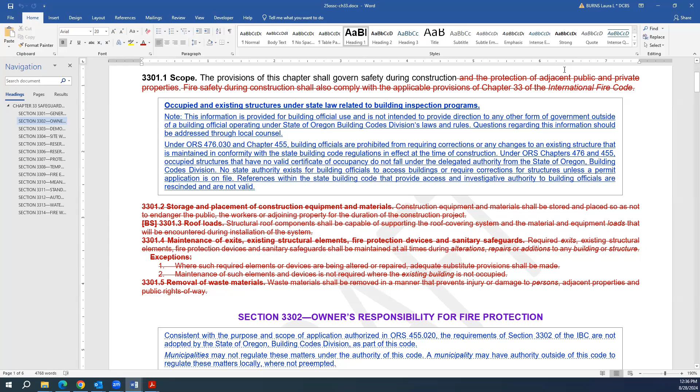Okay. So that brings us through chapter 10. Then we're going to move on to 33. 33 is pretty short, but we just want to show you the pieces. I think last time we really did kind of hone it in a bit during the 22 OSSC. So under the scope of 33, safeguards during construction, there's a lot of authority for local municipalities, and many of them have very specific, detailed, robust local programs for safeguards during construction. So we're going to just kind of roll through this.

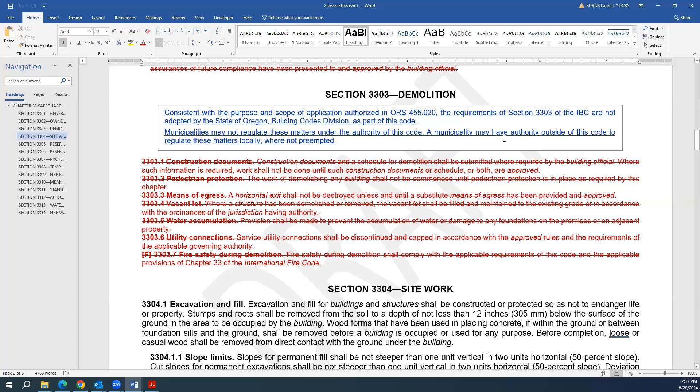You see the carve out here, just pointing again to the fire protection. So for example, in Portland, I think it's through PF&R, they have a very robust fire protection package for during construction. We'll keep on rolling. We also have demolition here. So as you know, under 455-020, it's construction, reconstruction, alteration, and repair. And we don't have demolition authority, but most municipalities do have an ordinance regarding demolition. So that's why we have a text box and a carve out there.

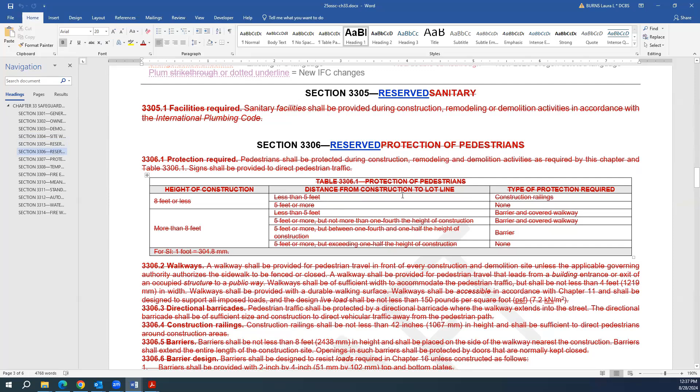Under site work, we do retain some of it. I think all of it, actually. Yep. I think we retain all of that, assuming it's on the site. Same with sanitary. We reserve it for protection of pedestrians. Typically, that's going off the site. That's usually going to be through Public Works. It's not under the authority that we have. Same with protection of adjacent property. Again, under our authority, we only have the authority for the site that is under active permit.

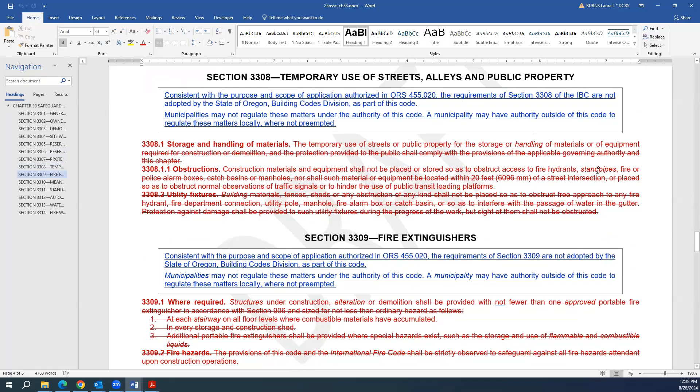Temporary use of streets, alleys, and public property. Obviously, we don't have any authority for that because it's off the site. But again, most municipalities have very clear authority for these things. And then fire extinguishers, that was one that was determined in consultation with our AAG when we took it out of 906 in chapter 9. This was the same type of thing, fire safety during construction. But definitely work with your local fire service. They probably already have some type of requirement locally.

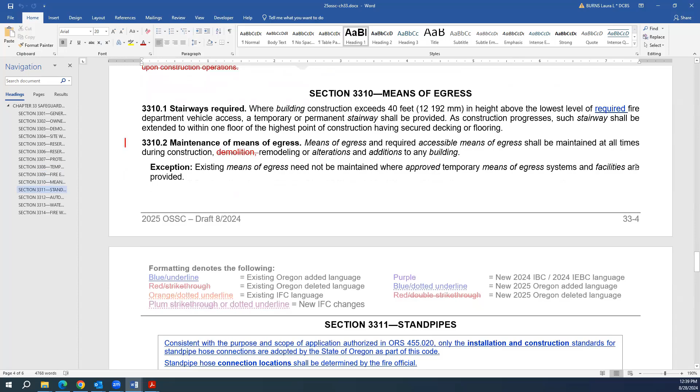Means of egress, we do adopt some of that. We strike demolition. And we have the model requirements there. And then for standpipes, we do note the same type of text box we saw in chapter 9: consistent with the purpose and scope of the application authorized in ORS 455.020, only the installation and construction standards for standpipe hose connections are adopted. Standpipe hose connection locations shall be determined by the fire official, which is helpful to kind of bifurcate that, and that also allows them to have them placed where they need them.

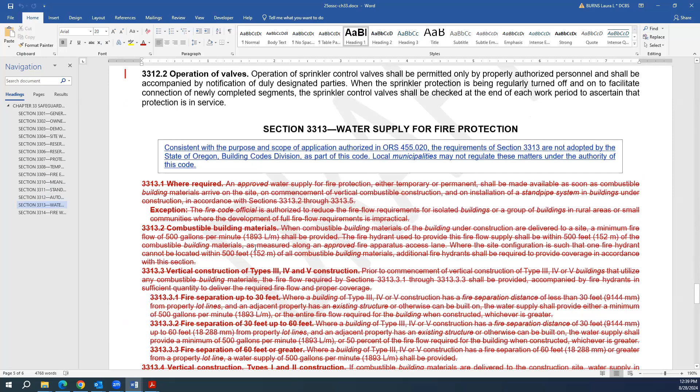So we have automatic sprinkler system. This one we've had for a long time. We align with the model there. Water supply for fire protection. Again, that's outside the scope of our authority, but municipalities do have clear authority for this, typically under their fire service. And fire watch during construction. All ties into that kind of fire safety during construction. Again, most municipalities have this authority independently. So probably a pretty boring chapter, but we've made it all the way through. Any comments, questions, concerns with 33?

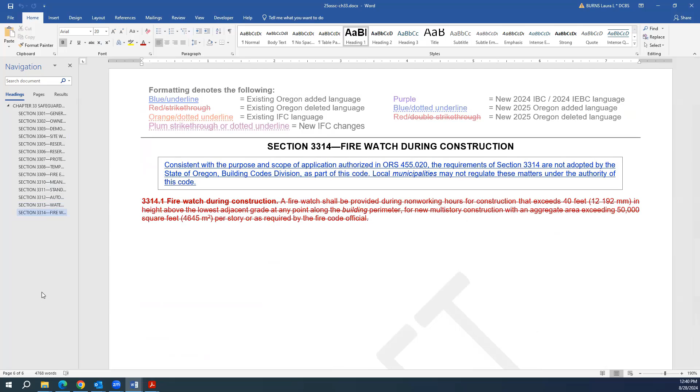All right. Thanks for the thumbs up there. So that brings us to the end. We're getting out of school early today. Who's excited for that? Hey, Tony. So what do we have left, Laura? Nope. Tony, Eric? Yeah, go ahead, Eric.

Sorry. While we're here, if you want to revisit those issues on 10 real quick. I was looking for the thing I think Jody was talking about on the guards, and all they did was strike the word approved in the second to the last one. I don't have it open right now. But that was what they did there, where it says approved guards. I think there's 9 items and it's item 8. I don't know if Laura can pull it back up, but, oh, instead of approved barrier. Not barrier, guard, the one before that. Hold on, 229. Okay, in number 9, new number 9, they struck approved for the 27. That was the change.

And let me see if it says why. I think that makes sense actually. Requirements like minimum height, blah, blah, blah. Introduces a term approved guard. Approved is a defined term. By using this term, the building official is now allowed to increase or decrease the specific requirements for a guard. Oh, I see what they're saying. So taking the approved away, I think that's what Jody was getting at, would force you back to guard requirements and take the flexibility away, so it has to meet guard requirements. Because this section says where the occupiable roof is less than 30 inches vertically to the adjacent unoccupied, I would like the flexibility, and then it's okay, so it's out at the edge of the roof. Mm-hmm.

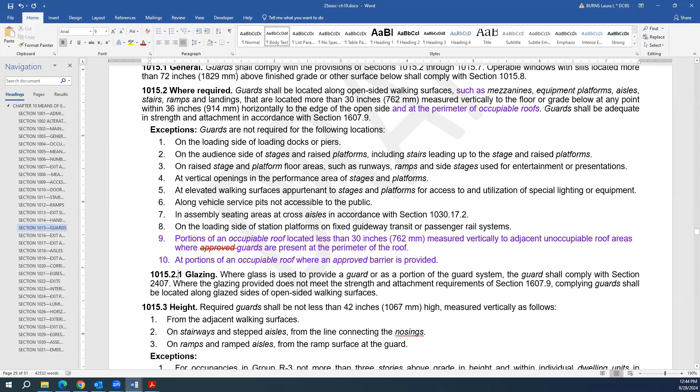Any other thoughts from the committee on that? I just think that, again, I agree completely. And I really like how 9 is guards and 10 is the approved barrier. So it gives really good flexibility between the two. Yeah, Ruby. Do we have to refer in this section to section 1807.2.5? In the foundation, we have the guard there too. Oh, right. Good point. Ruby brought up that we were going to add a pointer in this guard section to the retaining wall. 1807.2.5, in chapter 18. Yeah, it has a guard there. That's what we wanted to add, a pointer somewhere. I would think up in general. Yep, a new sentence at the end: see section 1807.2.5 for guards on retaining walls. Yeah.

Where guards are provided on retaining walls. Does that work for the committee? I think so, because it doesn't say that the guards are required on retaining walls. It just directs us there. Yeah. We tend to get a lot of non-permitted retaining walls, you know, silage pits, that kind of stuff. Yeah.

All right. Yeah, good one, Ruby. So should it be, see Section 1807 where guards are provided? You should say where guards are required, because doesn't 1807 talk about when they're required and when they're not, due to there being access to the public and a public walk surface on them? How about where guards are required to be provided on retaining walls? Okay. Sound good? Yeah.

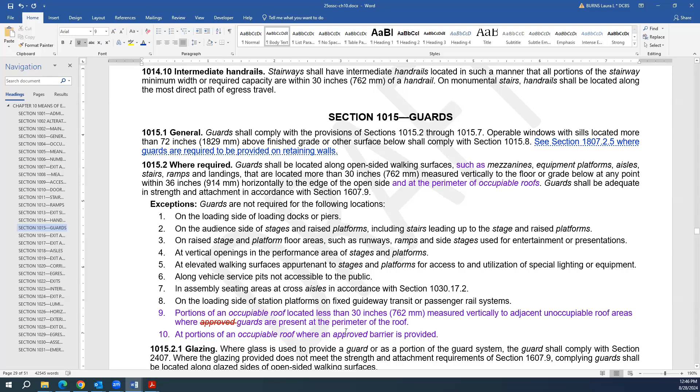All right. Okay, Tony? Yep. Okay, one more in 10. So the graphic symbol one in 13. Yeah, the pictogram. So they did approve that for the 27. And I don't know, can I share my screen? In lieu, right? Not in lieu. No, it's not in lieu. They broke it out into textual signs. So if you do a text sign, it has exit on it, or you can do this other one.

But can I share my screen now? Let's see. Yes. Is that shared? No. I don't even know. Why is it not shared? Screen one. Oh, I got to hit the share button. Okay. All right. Now is it shared? Yes. Yes. Thank you. All right.